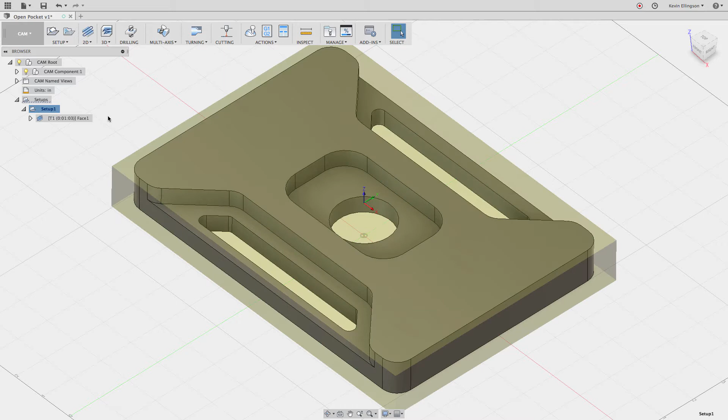So what I've done is I've created a setup of this part, and I've also created a facing toolpath just so you don't have to watch that part of it.

Now what I'd like to do is add some 2D adaptive contour moves. I'm going to choose to do a 2D adaptive clearing operation, go select a tool, and the tool I'm going to use is out of the tutorial inch set, the tool number 2, the 3/4 inch flat.

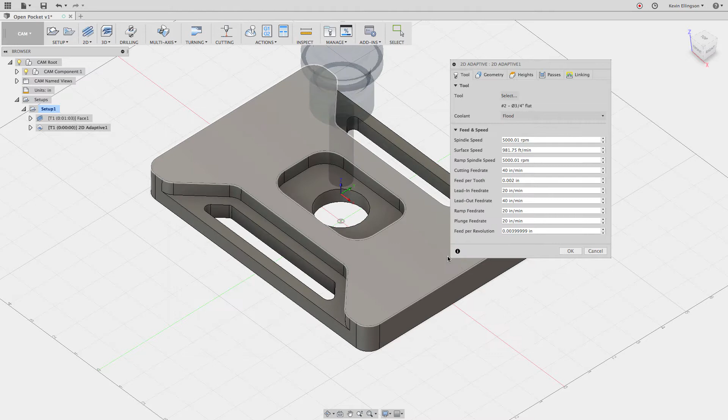For my geometry, here's the choice you have for selections: we can click on a face, or we can click on an edge. The purpose of this video is to show you that what you click on matters. So to start out with, I'm going to go ahead and click on that face.

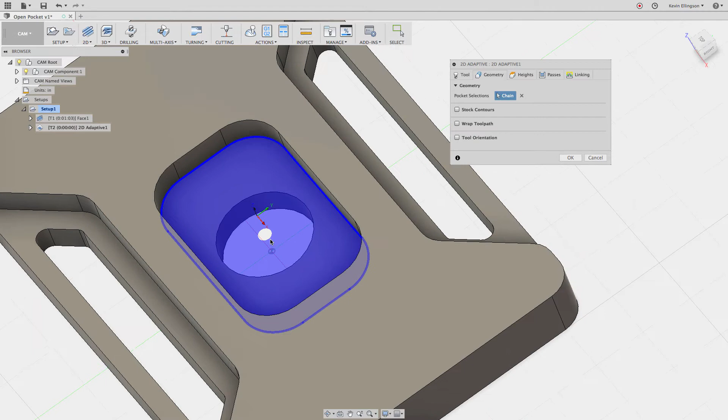Right off the bat, I get a visual cue that something isn't right. You can see that white circle that isn't shaded, and the shaded area shows us what Fusion 360 is going to machine. I'm not going to bother going through most of the heights, I'm just going to hit OK and watch what we get for toolpath.

So this is our first pocketing operation, or adaptive operation. We haven't roughed out any of the material yet, and what the cutter has chosen to do is plunge directly into the material. One of the things adaptive clearing is known for is to never fully engage the cutter while it's making a cut.

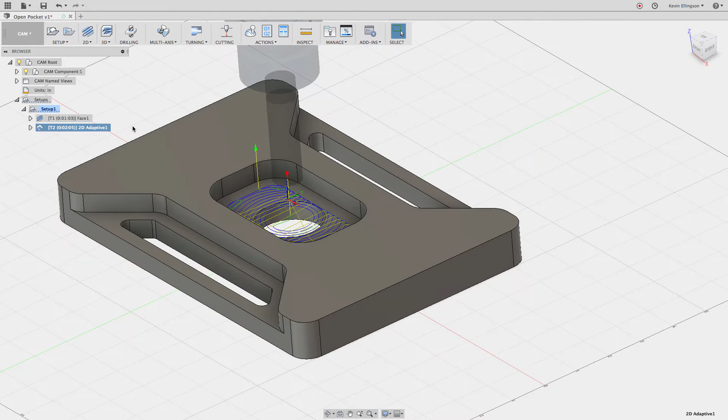So if I were to come back and simulate this, turn our stock on, switch it to a slightly different color, and hit play, I'm going to skip past the facing operation. Notice what happened if I rewind this back: the cutter fully engages into the material. It's going to come down in there and plunge in at a rapid speed, and that's not going to be good.

By definition, for what adaptive clearing is trying to do, it's excessively violating the amount of step over that it's supposed to be able to do. So let's go take a look at how we can fix that.

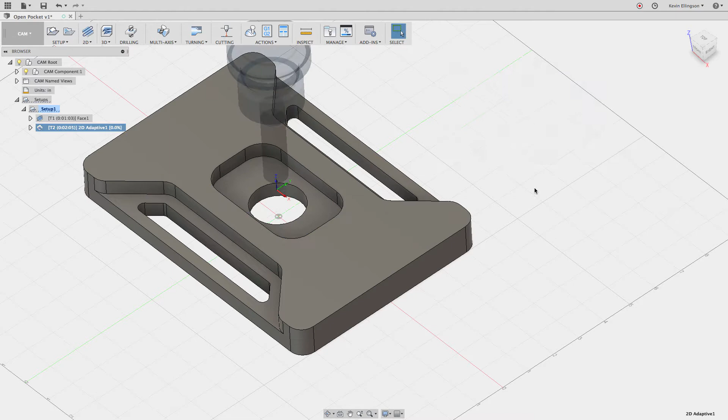If I edit that operation and go to my geometry tab, and this time throw that chain away and select on the edge instead of the face, let's see if we get a different result. The first visual cue I get is that entire thing is being machined, and you can see the tool is helixing into the cut this time, which is exactly what we're going to want.

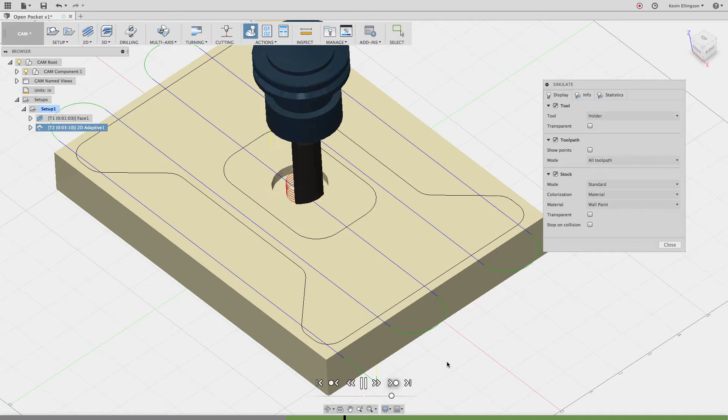So again, if I go to the setup, turn the stock on, hit play and skip to the next operation, here you can see the tool is going to helix into the bottom rather than just plunging straight into where it thinks there's no stock. So we'll go ahead and hit close on that.

So when you click on faces, Fusion is looking at the total topology of the part, and it thinks there's no solid body there, so it's okay just to plunge right in the center. Sometimes you're going to want to click on the edge versus the face.

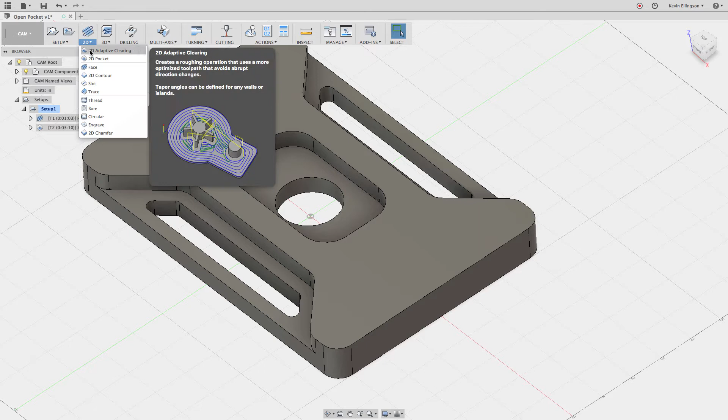Let's look to see how Fusion deals with an open pocket now in the same way. I'm going to do a 2D adaptive clearing, using the same tool, and this time I'm going to go ahead and click on that face, and we'll hit OK.

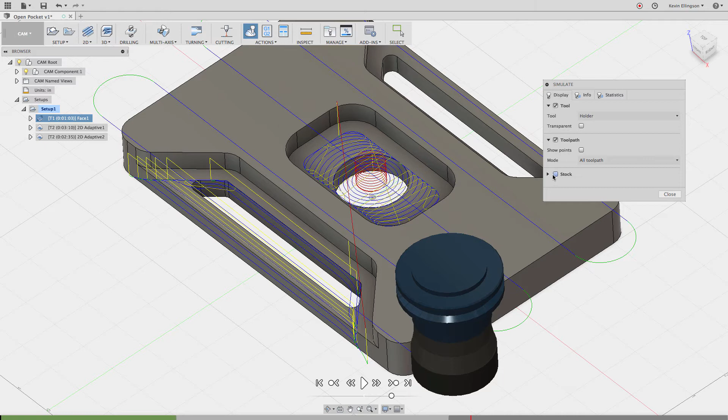And things look kind of okay. You'll notice that it skips a big region across here. So let's go ahead and simulate that setup again. I'm going to turn on the stock, and I don't want to watch everything, so I'm just going to click on the 2D adaptive, which is going to take us to that point.

I'm going to slow this down a little bit so we can see what's going on, and let's go ahead and hit play.

So the cutter is coming in, and the first thing you'll see is that it's going to do a rapid collision with the stock right there. It's taking a pretty hefty step over. By default, I should be taking 20% of this 3/4 tool, which is much less than what it looks like, it's over half the tool engaged in right now.

So that first pass wasn't so good. Let's see what the second pass looks like. The cutter's going to go down, and now it's taking that smaller step over, the smaller optimal load that we are hoping for. So let's go ahead and speed this up and watch what happens with the toolpath.

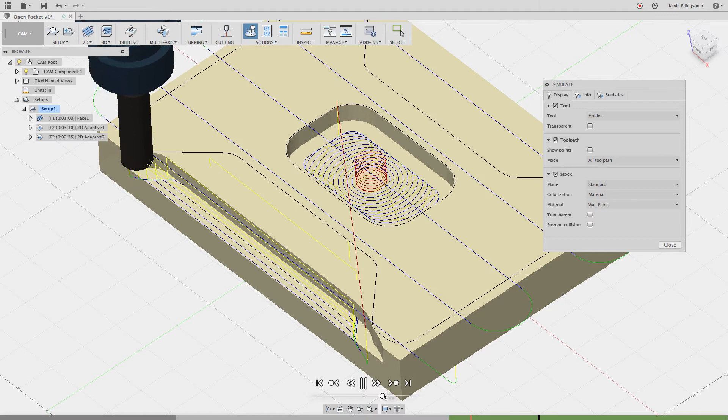So there you can see it starts to leave a strip of material, and for that one swath it was really way over-engaged again because Fusion thought there was nothing there, due to that pocket that's underneath, the through area right there.

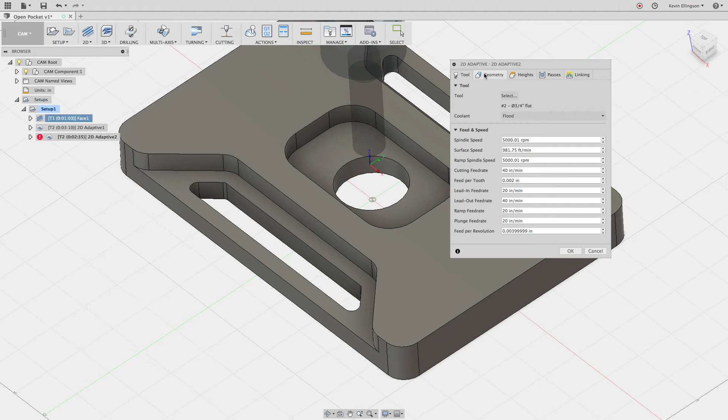The fix for this is to edit this. I could go to the geometry tab, throw away my chain, and if I click on the edge now, you'll see that this toolpath extends all the way out to the stock. You can see the blue preview arrow goes outside and extends back to the stock.

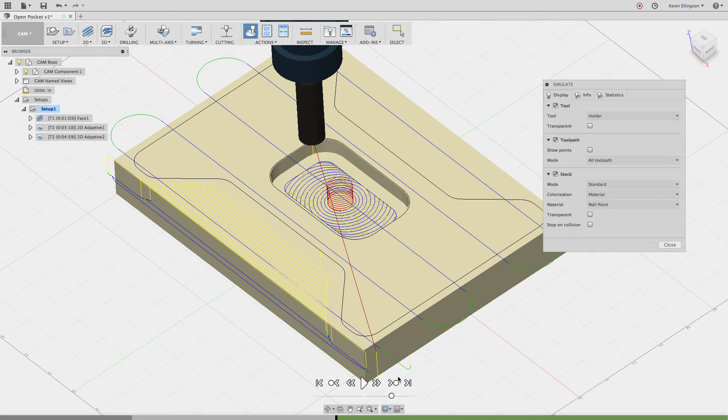When I click OK and simulate the setup, I click on the place where I want to start, turn the stock on, and hit the play button. Now we see no collisions with the stock, and it's doing the constant step over that adaptive toolpath is famous for.

I'll speed it up, and we'll see that no longer does it skip that strip of material where there's a through pocket going through.

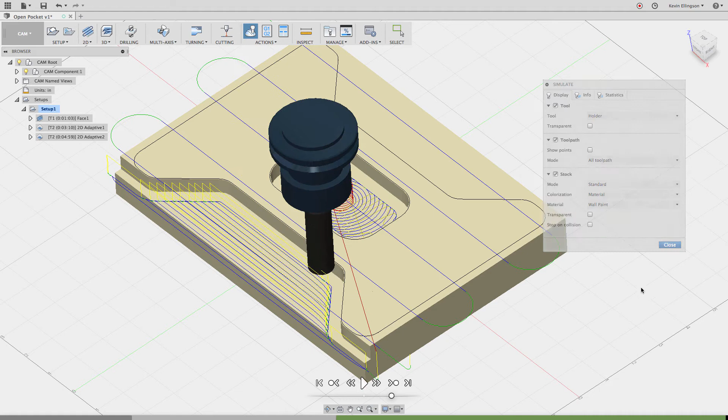There's one more way you could deal with this, although I recommend you not do it this way. If I edit the toolpath, go back to the geometry, throw away the chain, and select on that face, there's also a box we can check called stock contours. When I check that, it extends the toolpath to the stock contour boundary — same as clicking on the edge, except here I click a checkbox instead. So this is a different way to do it, although my favorite way is still to click on the edges.

Okay, I'm going to accept that toolpath. So now we have the inside pocket roughed out, and the outside pocket roughed out, but we left some material. Let's go see how much we left.

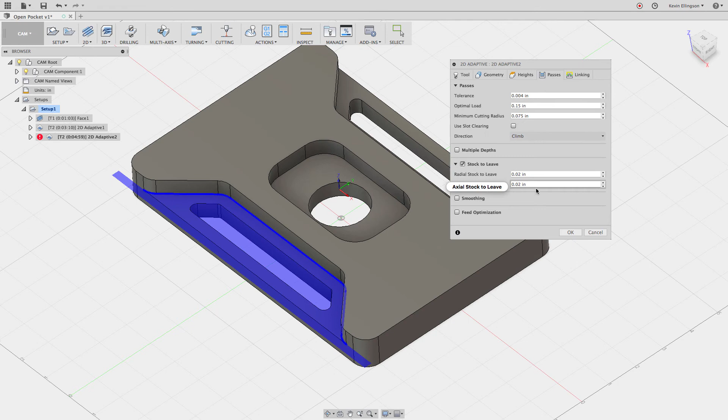If I go to the passes, I left 20 and 20 on that one. And if I edit this one on the passes, I also left 20 thou and 20 thou. So let's use the 2D pocket to come back and clean that up.

I'm going to select 2D pocket and go grab some geometry. In this case, I have some choices I can make again — I could click on the edges for both of these, and in fact I'll do that for the very first one.

Let's go adjust the heights, hit OK, and see what we get first. So here you can see that it helixes in, and this one maybe does a little bit extra material than what it needs to do.

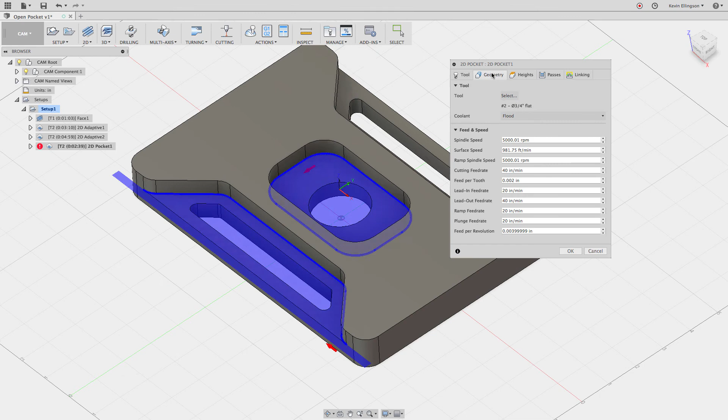So instead, I'm going to edit this. Let's go to the geometry, then the heights tab. Instead of cutting from the stock top, I want to change to selected contour — so in this case I'm cutting from selected contour to selected contour.

I'm going to leave 20 thousandths of an inch of material, and start 20 thou above that. Let's click OK, and see, now it did a lot better here.

It just ramped in. But it's still going across this bore, and it's also machining farther outside than what it needs to do. So let's edit this pocket one more time.

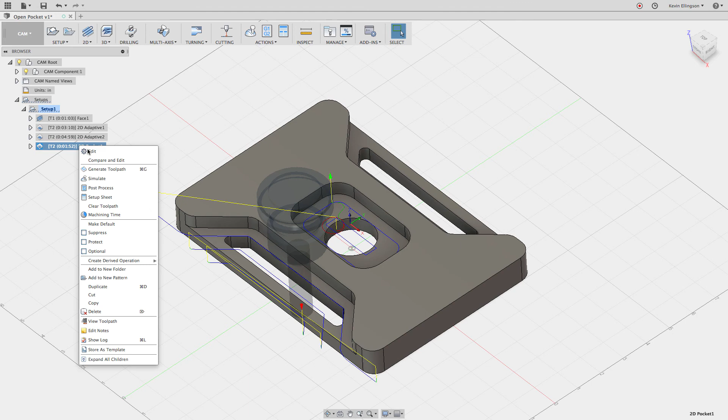Go to the geometry, throw away my selections, and this time click on the faces instead. Choose OK. Now you can see it's not wasting as much time going across where that bore operation is, or way out to the very edges of the stock.

So for the adaptives, it was more beneficial for me to click on the edges of the profile I wanted to cut. For the 2D pocket, it was more beneficial to click on the faces. There's no one right answer — there are different situations where you'll click on an edge or a face to get different results.

So I hope that helps to understand what Fusion is doing when clicking on different pieces of geometry, and why you get different results.